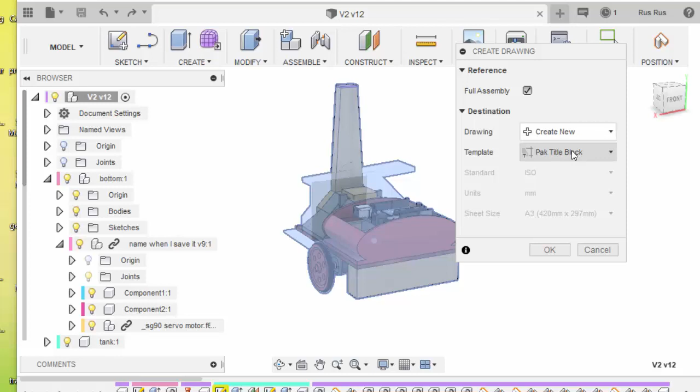Then go to File. We're going to make a new drawing based on our design. Here we're going to bring the full assembly into the drawing. We're creating a new drawing and we're going to have the title block we've already made. So we click OK for that.

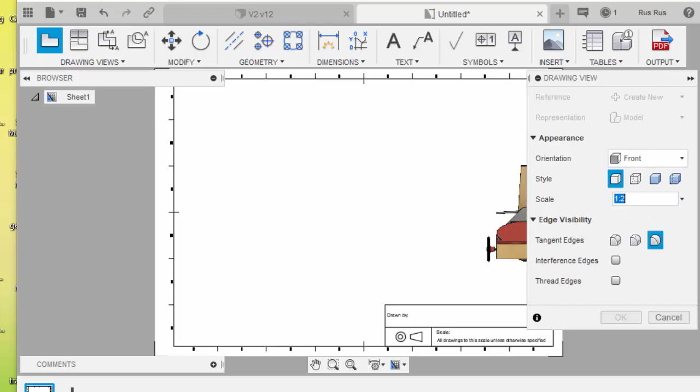And now it's creating a new blank sheet with the new title block, and it's going to give us the opportunity to put this in. So the scale at the moment is 1 to 5. We'll change that to 1 to 2. We'll just carry on all the way up here, it'll be off the screen because it's right at the top. 1 to 2.

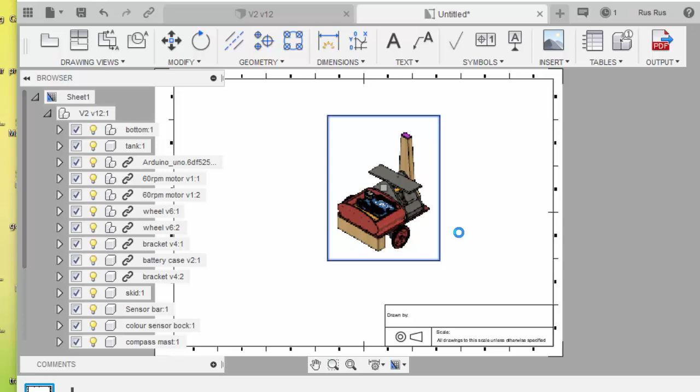We can also change the projection that we've got, so we'll try that. Place that there. That might be all you want to have on your first page.

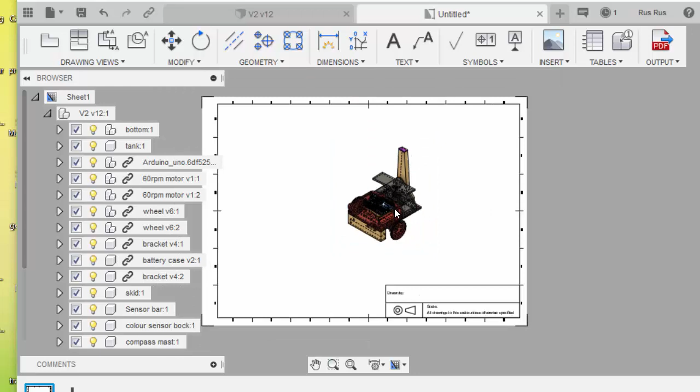If you want to keep the colour, double click it and go for shaded, and it should put in a fully shaded version of what you want. Oops, I've gone through the wrong thing. Let's put in hidden lines. Check it again. Shaded.

Okay, we can now go back to our model and we can start making drawings of the parts.

So if we click on this one, we'll find out what its name is. Maybe we'll just click on that. Here it is, it's the compass mast.

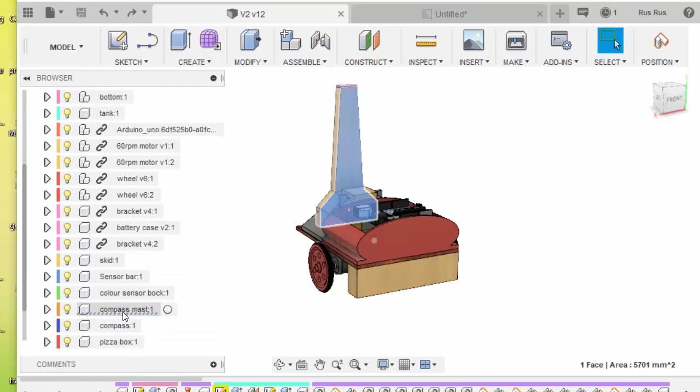Okay, so we can right click on that and we can move up here until we find Create Drawing, which once again is just off your screen. And we're not bringing in the full assembly, we've already selected the component that we're bringing in.

We're not going to create a new drawing for this. We're going to go into the one we've just made, which we have not yet named. We may create a new sheet, so it'll go on page 2 now. So we'll go OK.

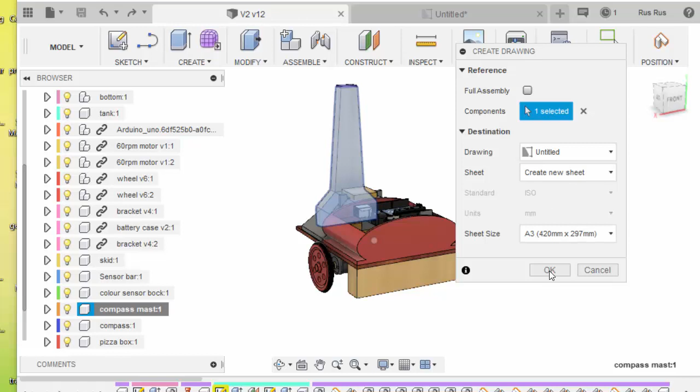And now that's coming in at a scale of 1 to 2. So we'll click there, and that's our parent view which has been put in. So we can just go OK to that.

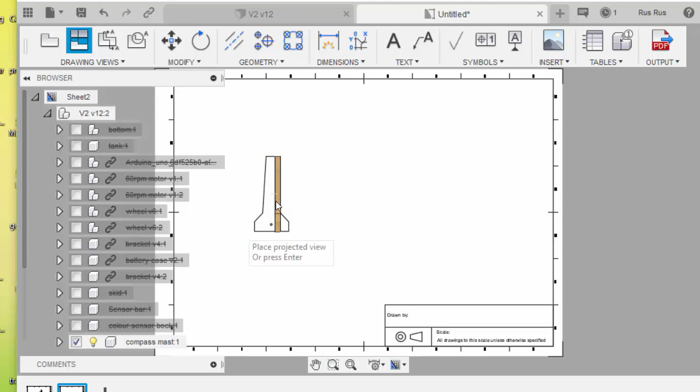Then we can go Drawing Views, do a projected view, select this parent view. Then if we move off to the side, we'll get a side-on view of it. If we move upwards, we'll get the top view. And if we move out here, we'll get an isometric view. Press enter when you're finished.

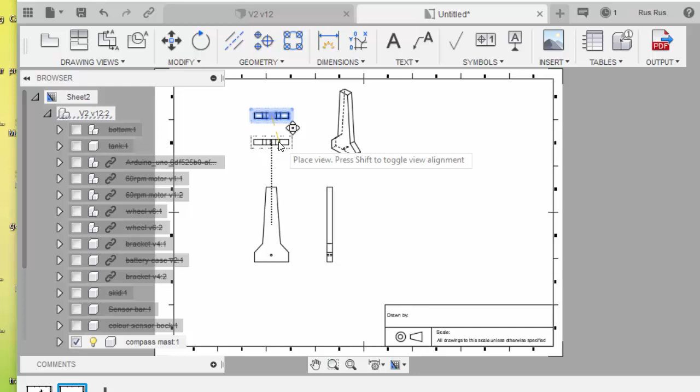You'll notice that when you go to move these things around on the screen, they don't move as freely as you might think. This view always has to line up in the same height as that one. So if I move this one up or down the page, it'll take that one with it. And I can move this one up and down the page, but not sideways, because it always has to line up with the parent view.

I might decide now to move these out to the corner of the page so that I can put some other view of another component. So I can take this out here and then bring the other one across with it.

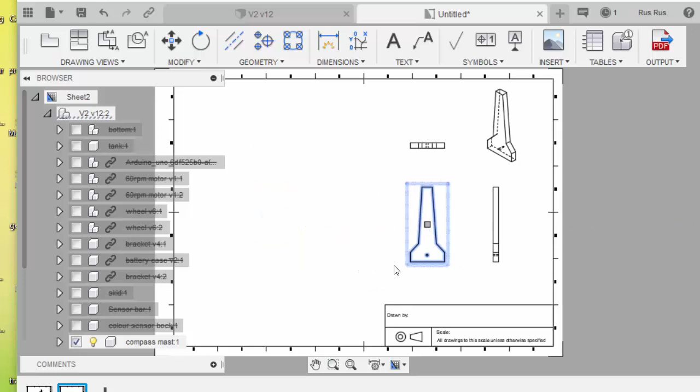There it is. At this point I can start putting dimensions on these things. The space here between the views, and this space around here, generally try not to put any dimensions in there. So if we want to dimension the overall height, select the Dimension tool, click there, move it out.

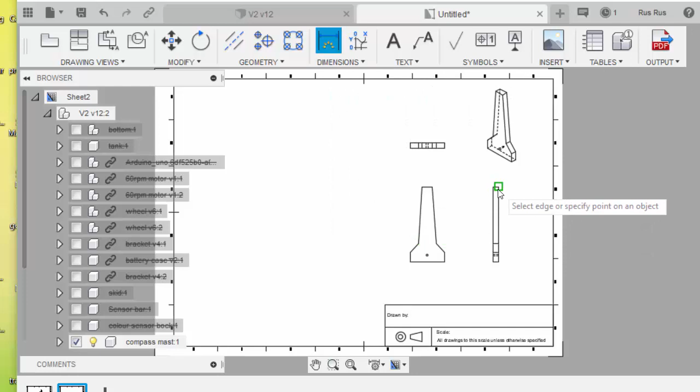There we go. We want the overall width of it at the bottom here. Click, click, drag it out to where you want it, and click again.

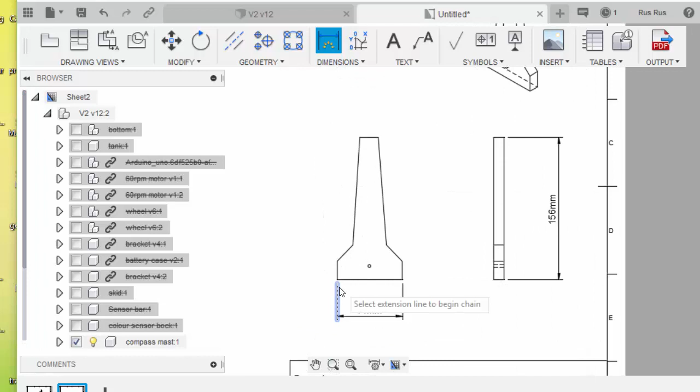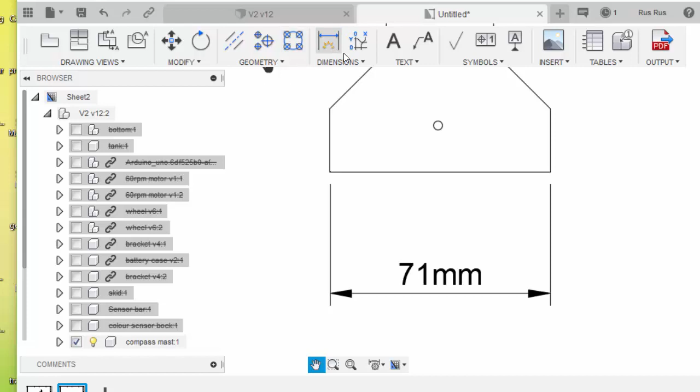If you want to dimension a hole, you have to change to a diameter dimension. Just bring that back a bit. Okay, so we'll just get our diameter dimension again. Click on that. There's the diameter come out there.

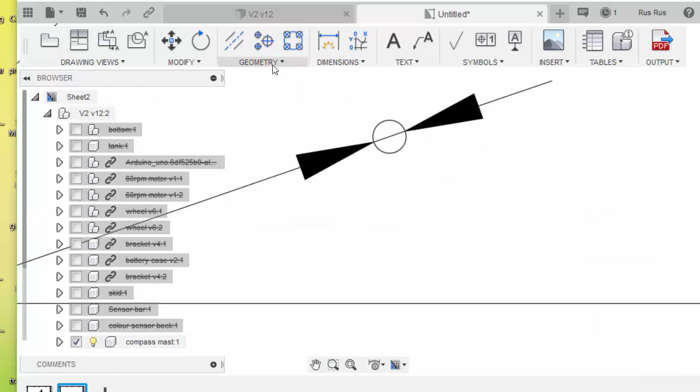With holes, you're also supposed to put a centre mark showing that it is a hole. So if we get that, here's your centre marks. Click on that, and there's your centre mark. If we just go across a little bit, there's the hole there, and that hole is also supposed to have a centre mark, but the centre mark when it's shown in this direction is called a centre line.

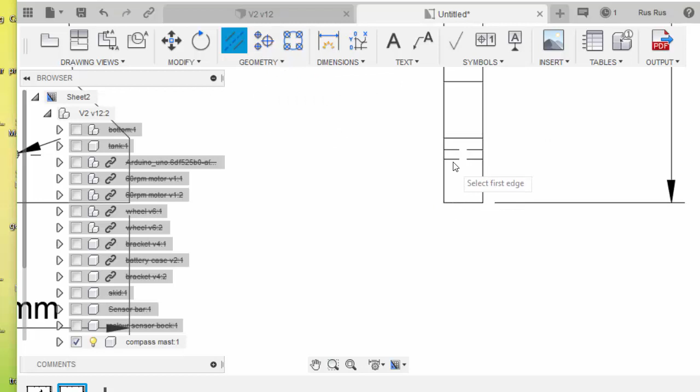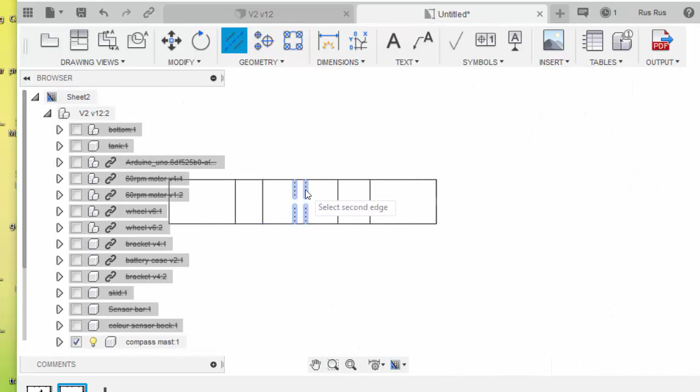So we have to pick on one side of the hole and the other side of the hole, and there's a centre line going through. We've also got the hole shown up here. So once again, pick one side of the hole and the other side of the hole, and there's the centre line coming through.

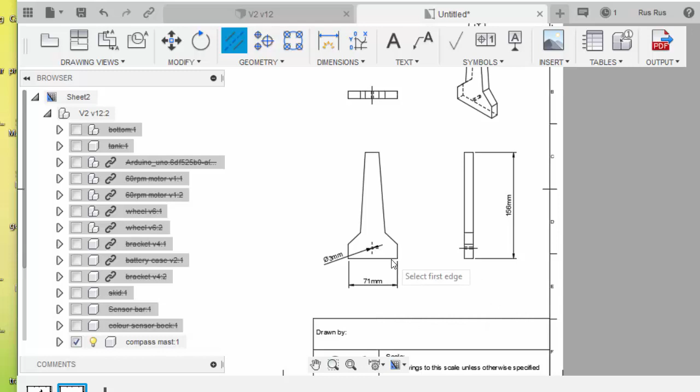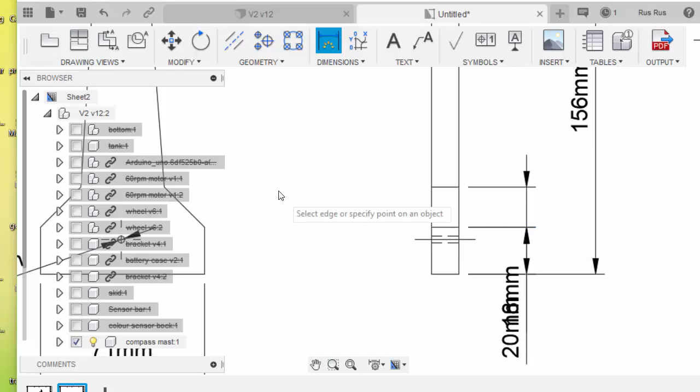Some of these dimensions you don't need to show because you've already got the dimension down here. The dimension of this line here can be shown over here. So just go get the dimension tool again, and this one. Now they overlap, so I'll just select this one and drag it up out of the way to that side.

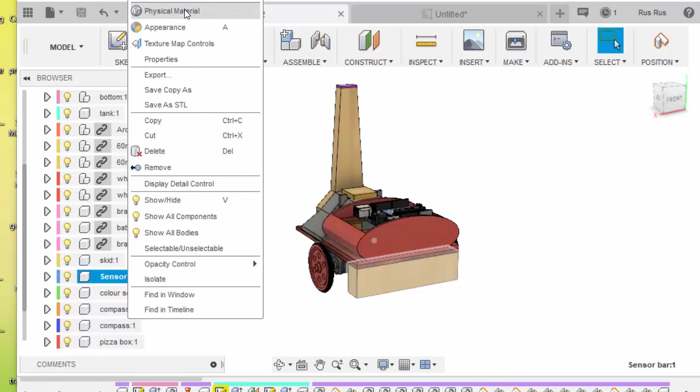We can bring in another part, so this time we want the sensor bar. Right click, scroll up here until you come to Create Drawing. We're going to take it into our existing drawing, onto page 2, and click OK.

When it comes to base view, I might change the base view a little bit. At the moment it's put in a front view. Top, bottom, try that one, see what it is. Yeah, that might show it a bit better, so I'll place that view.

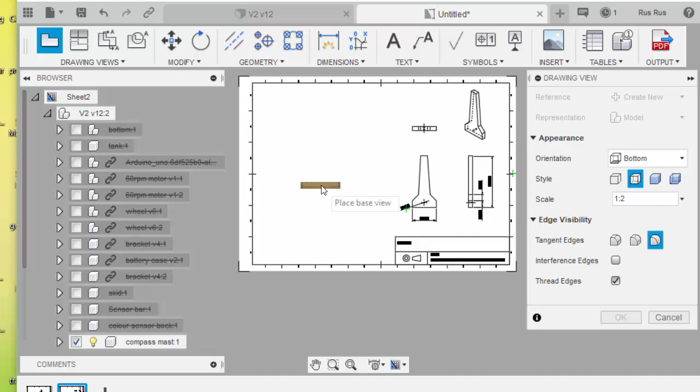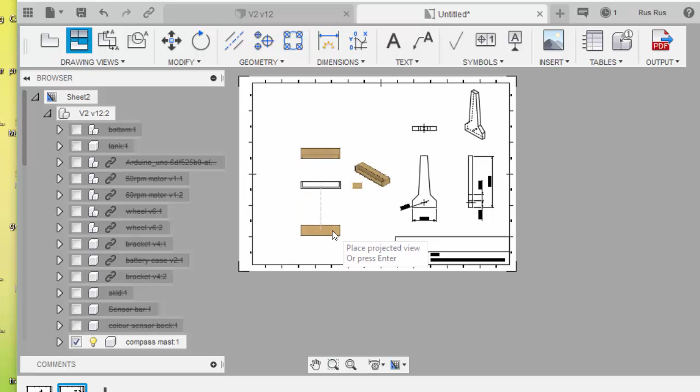Okay, scale of 1 to 2. Select that. Projected views. There's one. There's another. There's another. Hit enter.

And then we can rearrange these views on the page and edit them as we wish. So this will pretty much get you started with how to put drawings of individual parts onto your documents.